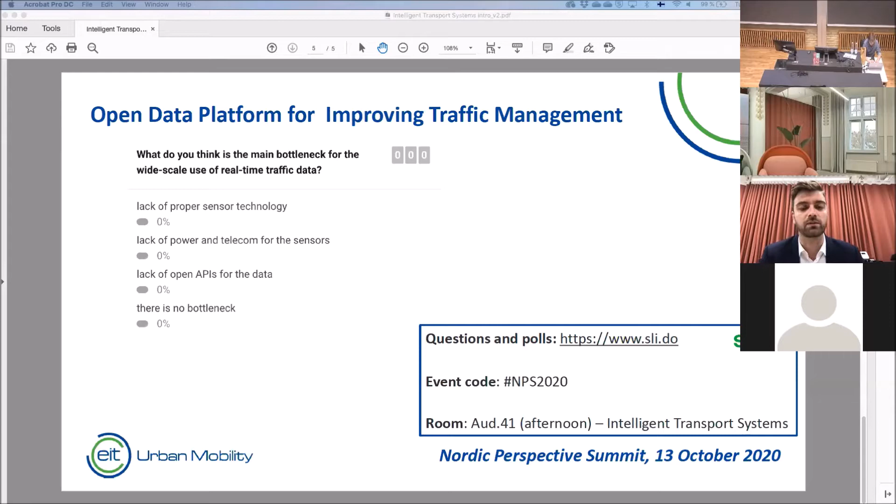Can you start the video? Okay. Hello, everyone. My name is Iisakki Kosonen. I'm a researcher from Aalto University, and today my topic is this Smart Junction project and open data platform for improving traffic management. This project is part of the Jätkäsaari Mobility Lab, which Juho was talking about. I will first go through the technical sides, and then some examples of the research we are doing at Aalto University related to this project.

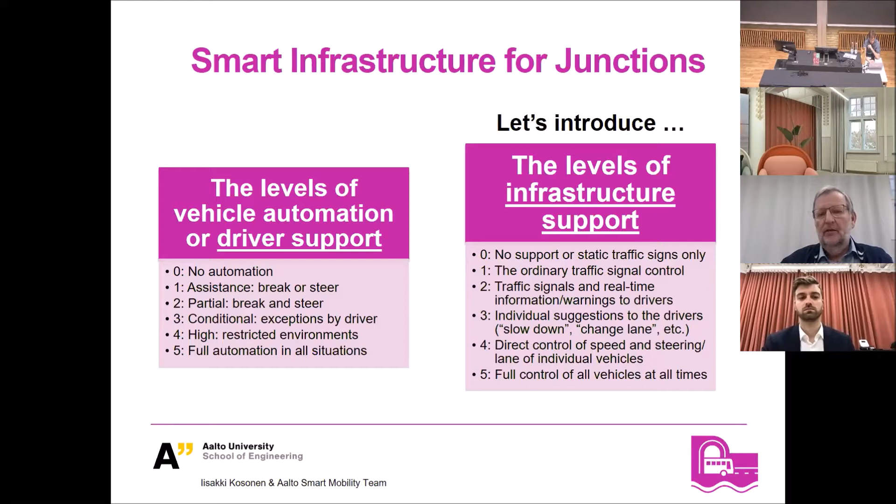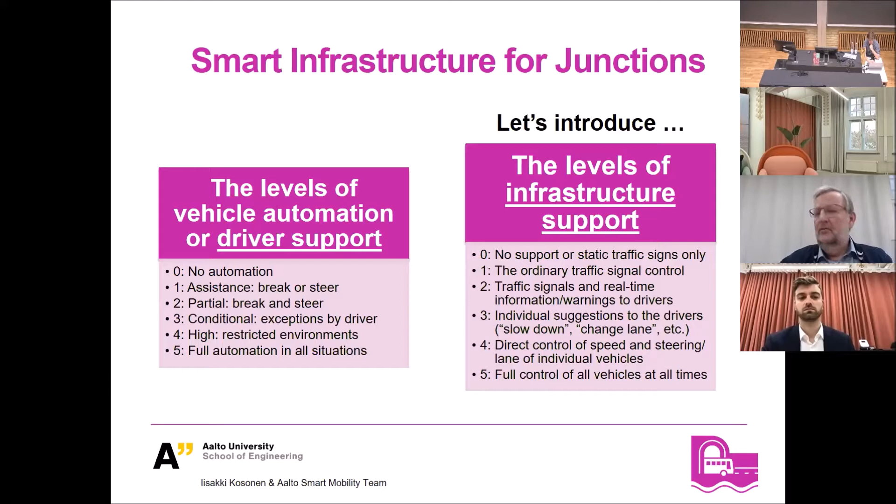So the idea behind this is that we have different levels of support for drivers in vehicle automation. Why don't we introduce similar thinking on the infrastructural side? At the moment we are at level 1, where we have the ordinary traffic signal control. In this Smart Junction project, we are working on our way to the next levels of providing real-time information and access to control or guidance for vehicles, and finally towards higher levels of automation.

We are working in several phases. The first phase is to install sensors at the junctions. At the moment we are installing radars and cameras, and we will also have access to floating car data, like public transport in the first phase, and possibly other vehicles later. This data will be fed into a model that simulates the traffic situation, and we compute different measures of performance. We also offer an open API for the raw data and for the calculated or processed data.

The second phase is toward optimization and control of traffic signals and other control measures, which I will speak about later in more detail. The third phase relates to the connected and automated environment, adding new types of sensors like air quality and emission sensors, and so on.

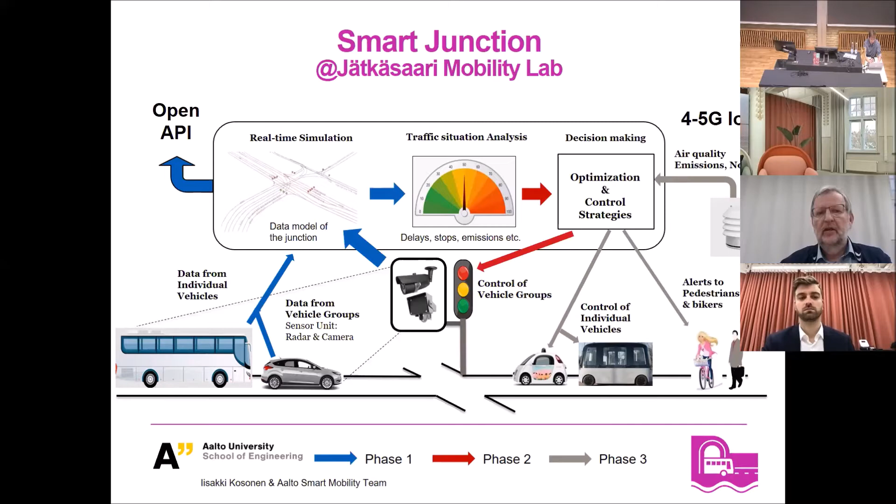Our aim is to install 7 junctions in Jätkäsaari. This is the main corridor out of and into Jätkäsaari, and we will install sensor stations at each junction, pointing towards each approach. Each sensor station has a camera and radar, plus a box for communication and processing of the data.

Additionally, we can have access to the traffic signal controller, getting the traffic signal states and traffic detector states, as well as positioning data for public transport and emission data.

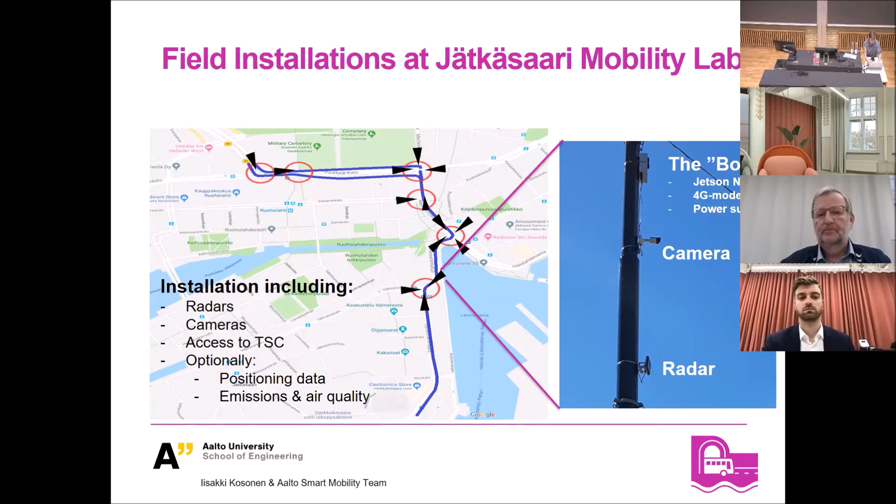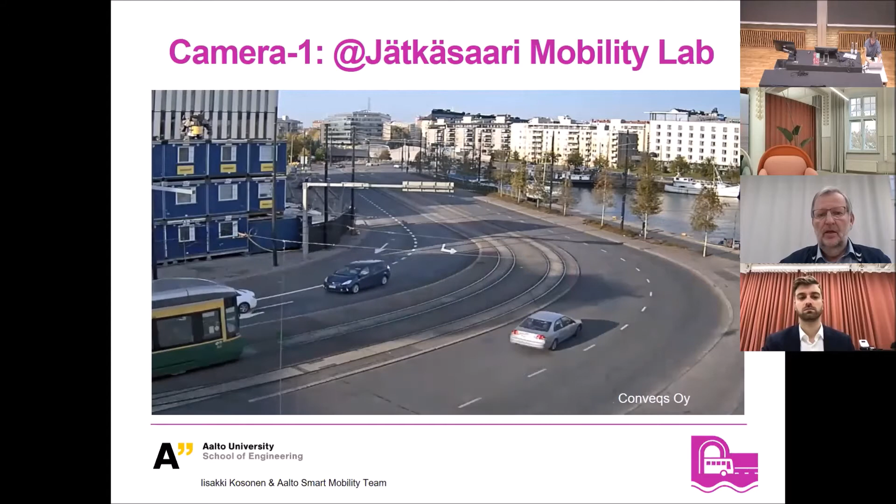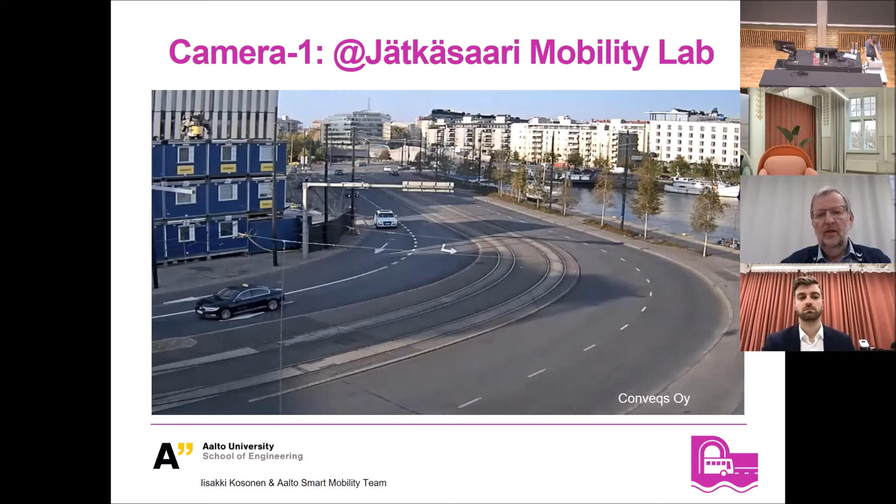Here is an example of the first station installed in Jätkäsaari. We get this kind of video data nearly in real time, a couple of seconds behind, and we will install more of these. The benefit of a camera is that you can detect objects better, and we will add AI to detect what is a car, what is a vehicle, what is a cyclist, and so on.

Then we have the radar input. The benefit of radar is that it gets more accurate positioning and speed of the vehicles, but it doesn't recognize the type as well. However, it works in different weather conditions.

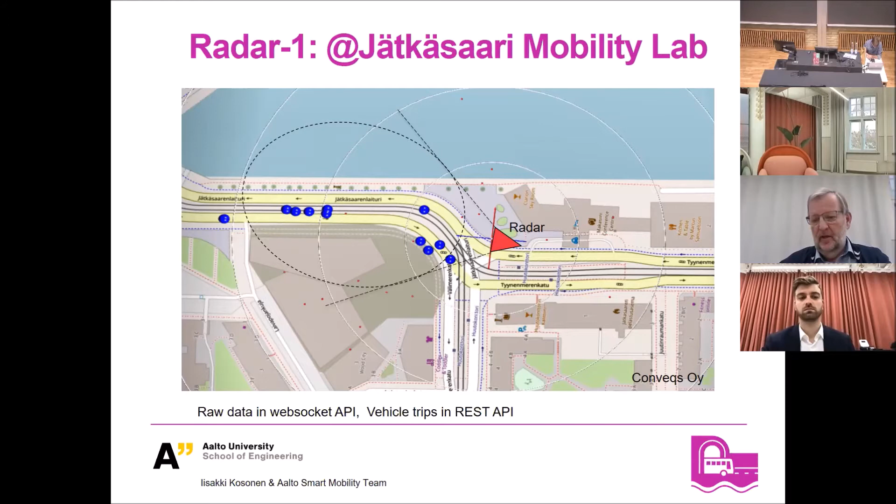Okay, now let's move on to the research side, which is supported by the Henry Ford Foundation. First, we are building a simulation model of this area, and we want to get this real data of the traffic demand that we get from these sensors.

We use it for simulation of different alternatives of traffic signal control strategies and optimization, and different aspects, and possibly also route guidance and connected and automated simulation of connected and automated vehicles.

The other aspect is that we use the simulation model also for state estimation of the traffic situations. We call this like a real-time digital twin, so that we know the speed and position of each vehicle at any time in real time.

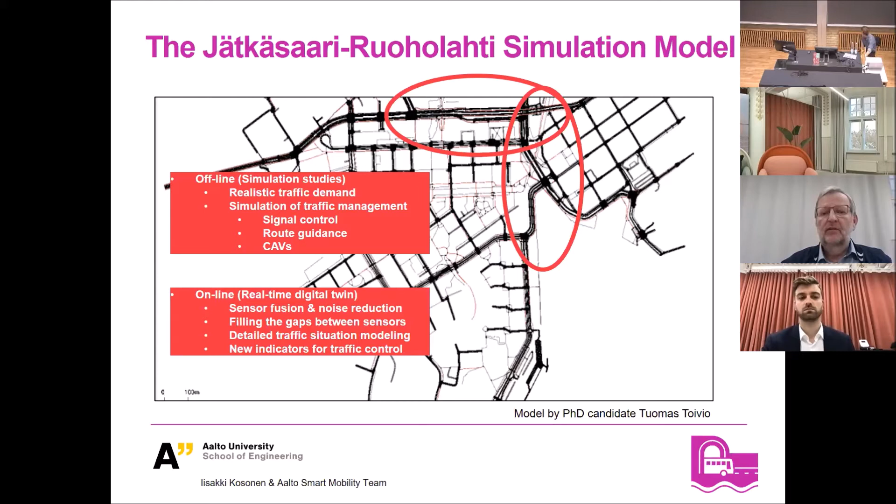And the simulation model is used for sensor fusion, noise reduction, filling the gaps between the sensors, getting a detailed traffic situation model, and getting new types of indicators for the traffic signal control.

Here is one example of research on traffic management and optimization of traffic signals. This is related to a more connected car environment, because here the idea is to use, instead of the vehicle throughput, the throughput of the road users, and this requires information about how many passengers there are in a vehicle.

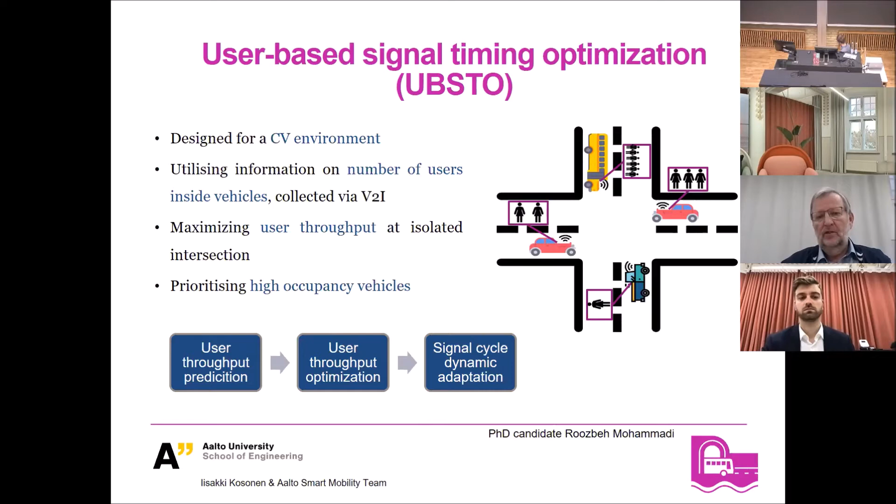So here the process is to first predict the throughput of users through the intersections, then optimize this throughput, and finally adapt the traffic signal control to maximize the user throughput.

One intersection simulation model is used here, with different combinations of vehicles. Some of the vehicles have 1 passenger, others have 2, 3, or 4 passengers within the car, and there's low traffic and high traffic conditions simulated.

The signal control options here are user-based signal timing, vehicle-based signal timing, and vehicle-actuated, traditional vehicle-actuated control.

And the results show that both user-based optimization and vehicle-based optimization improve the user throughput compared to the vehicle-actuated control, and the user-based optimization also performs slightly better than the vehicle-based optimization.

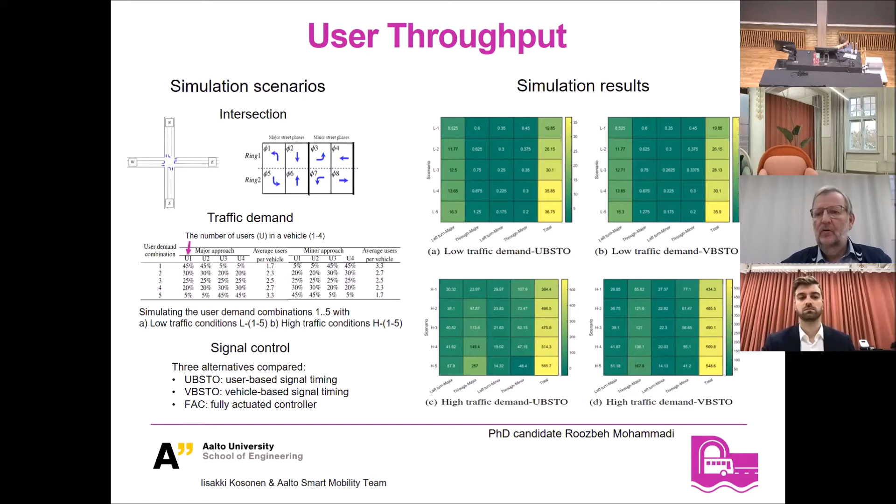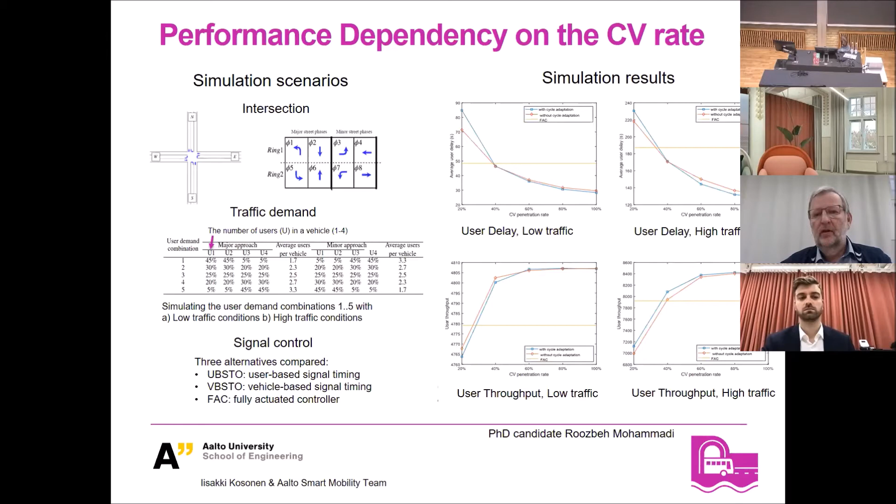Then another aspect of research is this policy-based optimization. The present challenge is that the controllers in the field don't really accept the policy as an input, but instead there is a large number of parameters, and it is difficult to understand the effect of this and what is the effect on the policy.

What we aim here is to provide simple access to the policy input, reducing the number of parameters, provide tools for policy optimization, and finally automation also for the optimization according to the policy input.

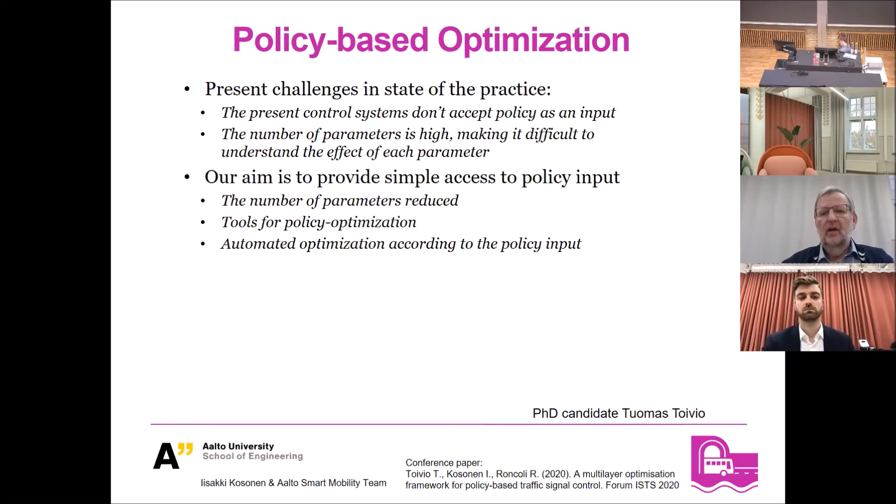So alternative policies may include minimizing the emissions, which is getting more and more important in the cities, favoring certain vehicle types like public transport or trucks or bicycles or pedestrians, favoring certain routes or so on, and also the trade-off in optimization between delays versus stops, which can sometimes be a bit contradicting.

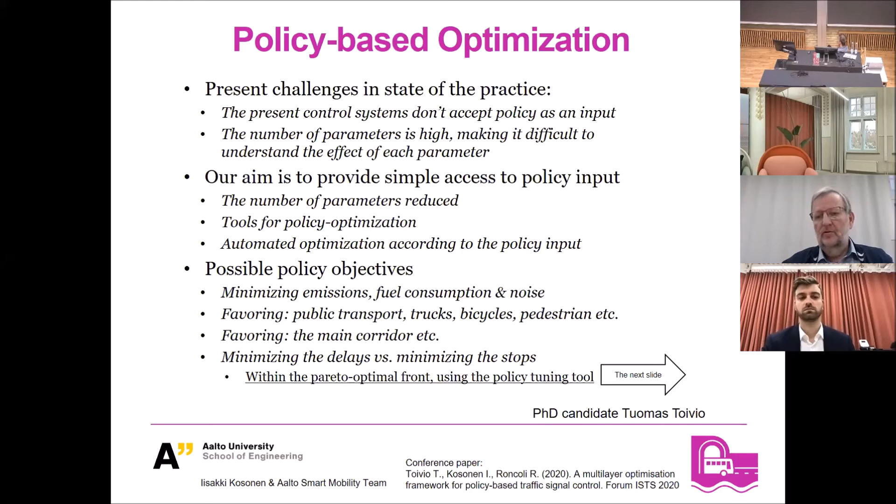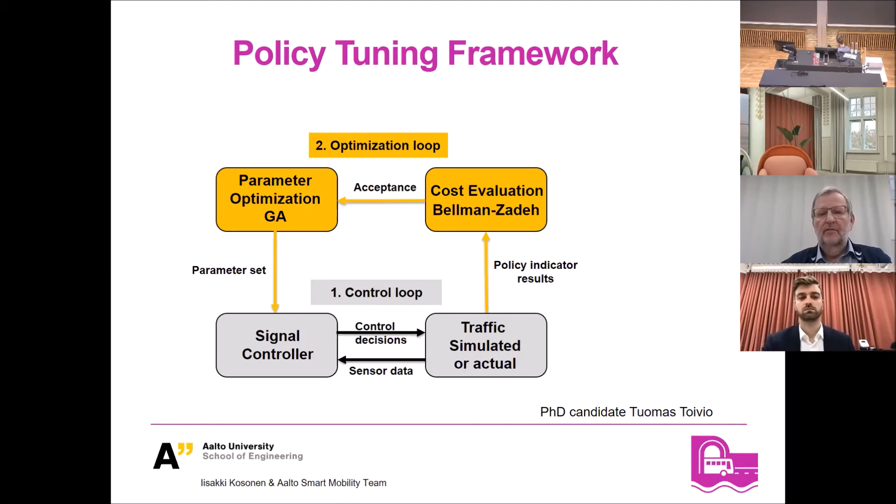The second loop is this optimization loop that gets these policy indicators from the traffic simulations, evaluates the fitness of them, and then provides new parameter sets for the signal controller. The third loop is this policy tuning loop that gets the performance results and then provides policy definitions to this optimization loop.

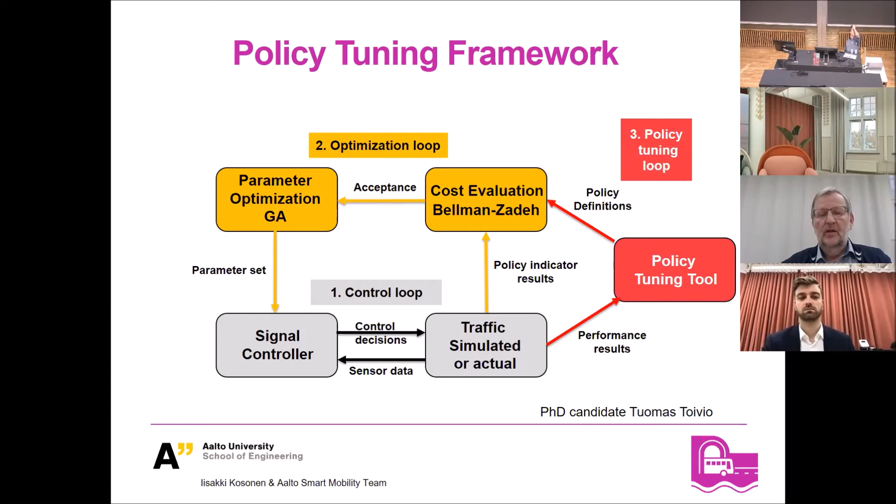And here is an example. This is a big intersection in San Jose that was simulated, and in step one we made a single criteria optimization so we can see what boundaries can be achieved by optimizing with one criteria only.

And these values then provide us a boundary box for the policy tuning that the user can adjust, what values are tolerated as a level of service and as a percentage of stopped vehicles. Then you can try different policies and see what are the performance of those.

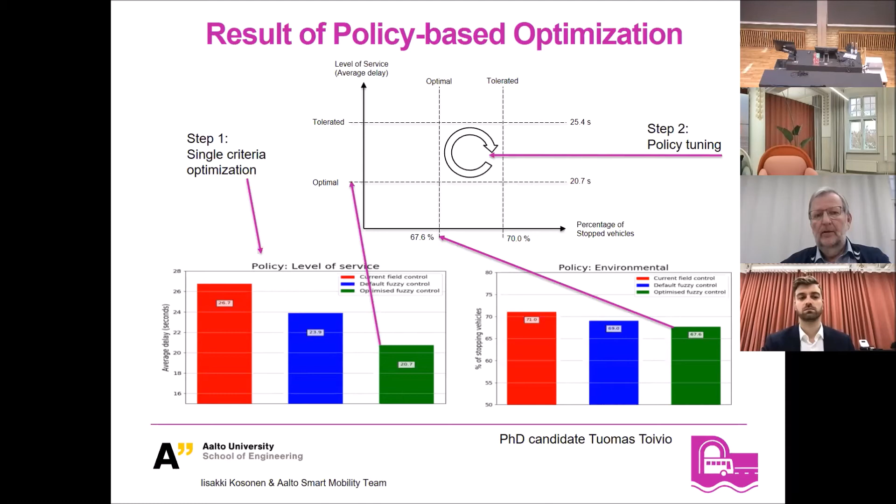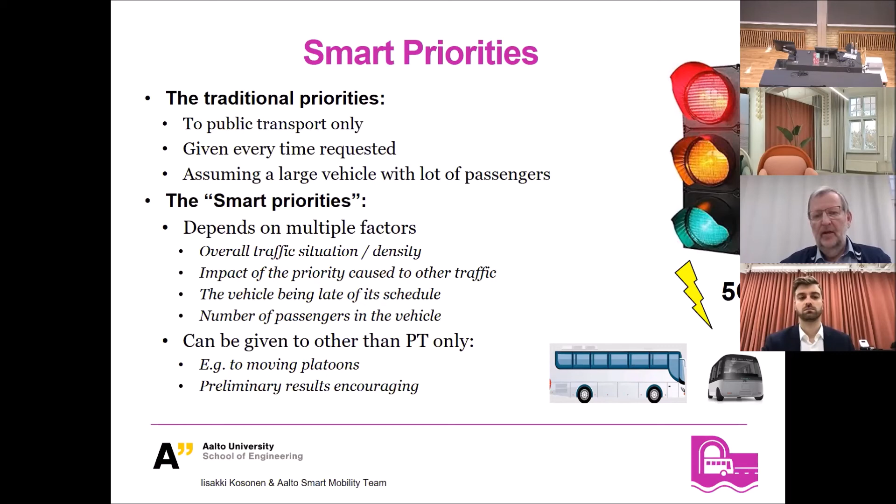So this is more preliminary. I don't yet have the exact numbers for you, but the preliminary results are encouraging. So we hope this could also provide some help in this Jätkäsaari project.

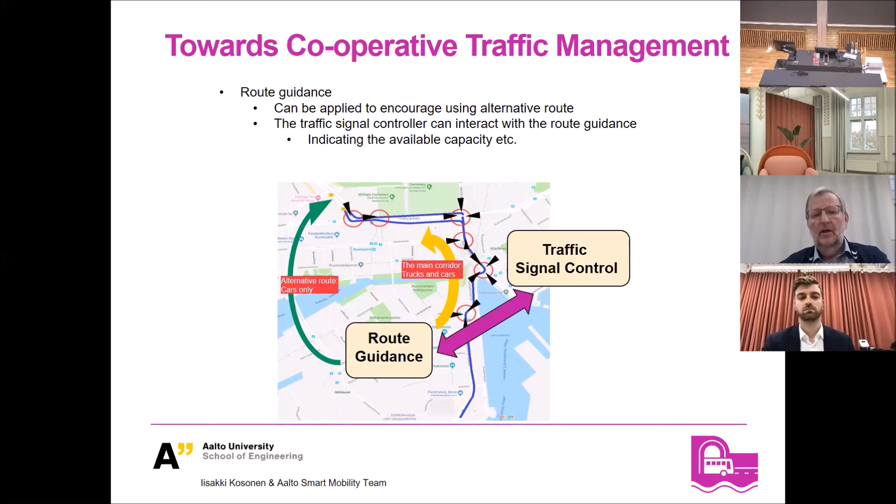Finally, we are heading towards so-called cooperative traffic management. We are now focusing on traffic signal control optimization, but we also have two alternative routes out of Jätkäsaari. The other alternative route is only for passenger cars, so they can be guided to this route depending on the situation in the main route.

And then we can get information of ferry arrivals, the arrival time, and the expected vehicle count out of the ferry. This system can give a heads up to the traffic signal control system and the route guidance, how to optimize their systems and prepare for the heavy traffic that is coming soon.

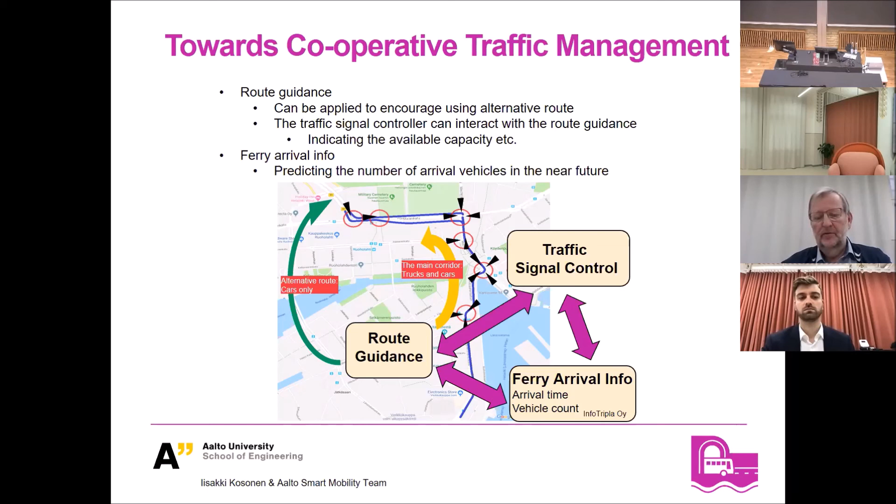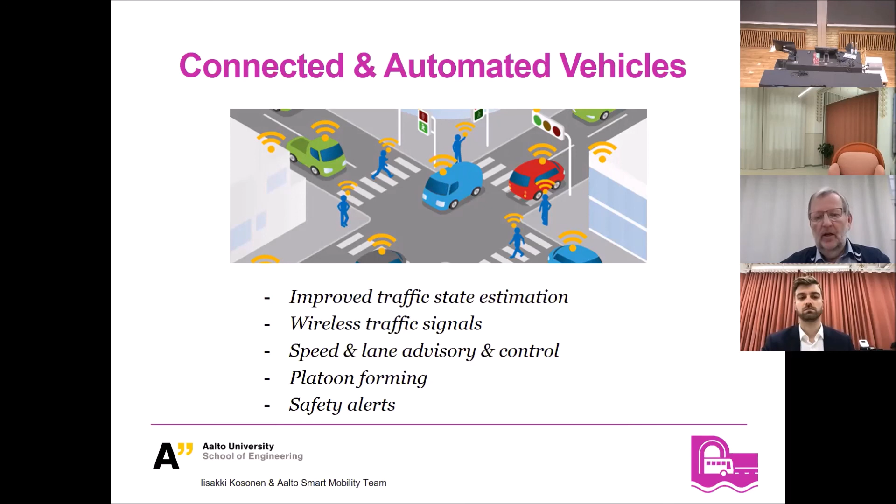Okay, so that's all. If you want more information, you can contact me or other persons of our smart mobility team at Aalto. And if you have more technical questions regarding the APIs or so, you can contact Kari at ConvexFi about accessing the data.

Okay, thank you very much, Iisakki. Well, one quick question again from my side.

Do you think there is an exact amount of data that we need to know, or the more the better?

Well, generally speaking, I think the more the better, and then we will learn if there is a certain amount that is already sufficient. But at the moment, I would say the more the better. Then we can do research and see if in some cases we can actually manage with less data. And the more is also good because we can then validate the data against other types of sensors. So yeah, okay, thank you very much.